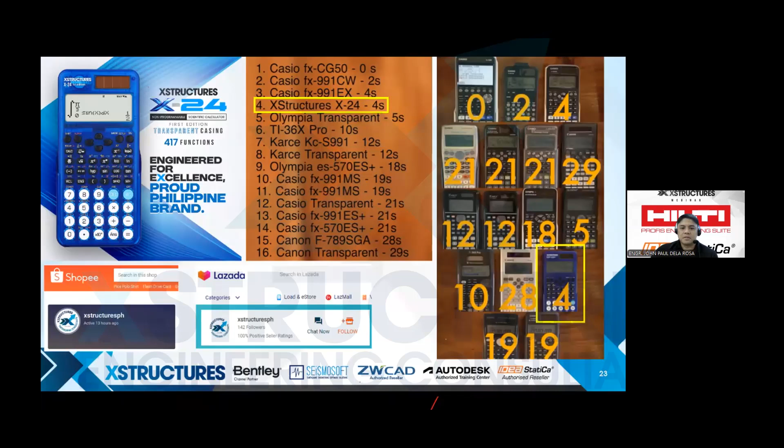So that's one of the reasons we entered the calculator market. It's because as a Filipino company, we can also produce a local brand calculator that can compete with the global brands.

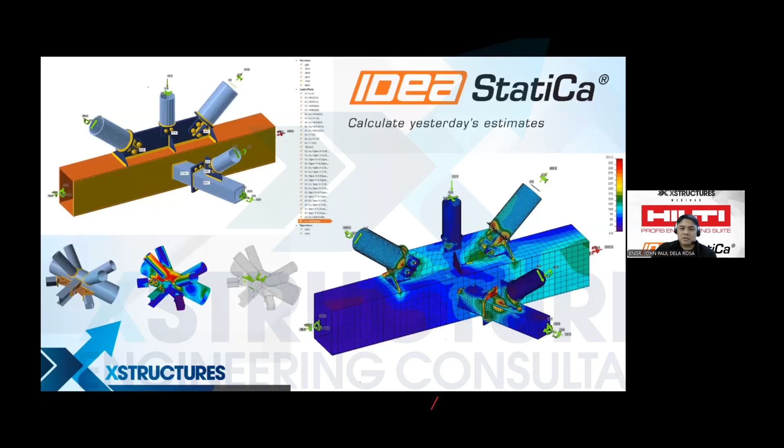We are the exclusive partner reseller for IDEA StatiCa here in the Philippines. IDEA StatiCa is your ultimate solution for complex connection design, like what you're seeing on the screen. These kinds of connections are difficult to design, but there is a tool that can definitely help you with a direct solution. Only IDEA StatiCa can do it. IDEA StatiCa has different levels or tiers of licenses: IDEA StatiCa Steel, Detail, Concrete, IDEA StatiCa Complete, or Enterprise.

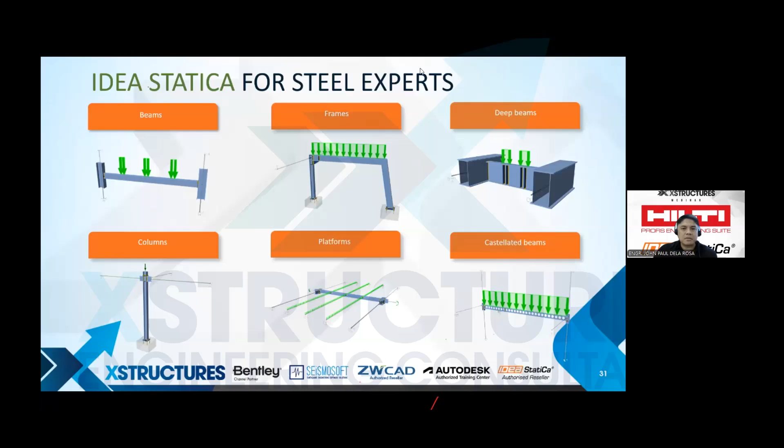For this kind of project, you can also use IDEA StatiCa for anchoring design, element design. This one is integrated with STAAD Pro for base plate design. Also, you can use STAAD Pro together with IDEA StatiCa for this kind of steel elements, for reinforced concrete elements as well, and for precast elements.

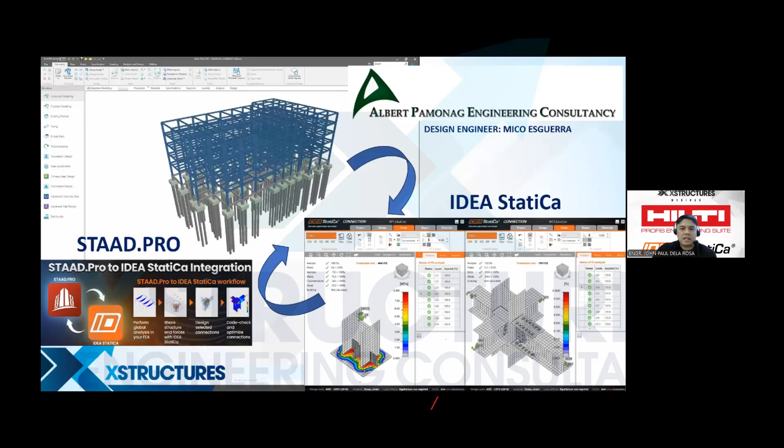For those attending here, maybe from universities or different colleges in the Philippines, we have an X Structures academic program where we can help your school secure academic licenses from Bentley and Autodesk, especially for the civil engineering industry's 6 fields of specialization.

We definitely have software to offer, whether it's structural engineering, geotechnical engineering, construction management, transportation engineering, water resources engineering, or environmental engineering. As I've said, for the different specializations in civil engineering, we have something to offer, not only from Bentley and Autodesk, but also IDEA StatiCa.

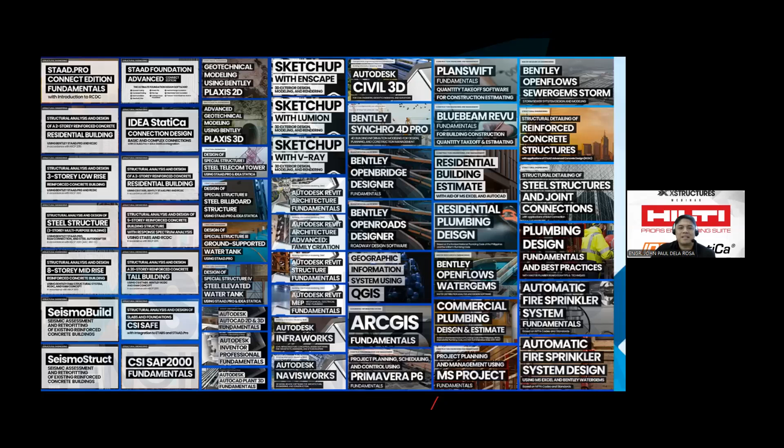And also, of course, Idea Statica and Seismosoft. When it comes to software partnership, we actually have so many partners. That's why we believe, and also from the award we received from Bentley, that's one of the proofs as well.

So for software sales of X Structures, as I've said, we have so many partners: Bentley, Seismosoft, and ZWSoft for ZWCAD. For building design, structural work suite and Idea Statica. For assessment and retrofitting of existing structures.

So we have the solution which is Seismobuild and Seismostruct. And of course, if you need a drafting tool at a reasonable price, ZWCAD is there.

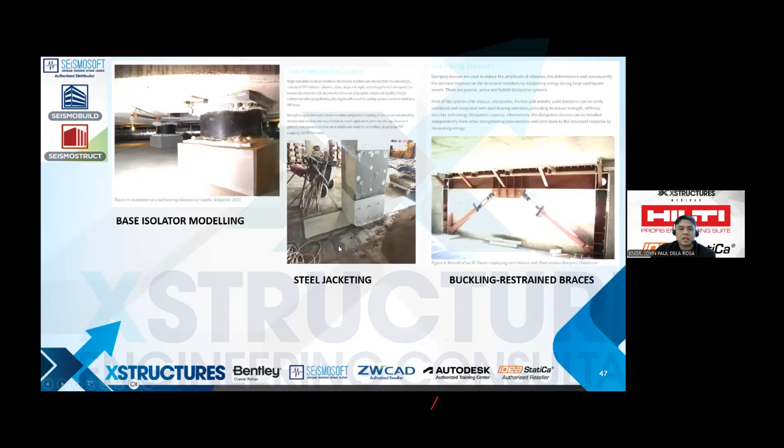For assessment and retrofitting, this is very prominent now, happening in our country. If you have a direct solution for retrofitting design, Seismobuild and Seismostruct would be your solution. This includes FRP and jacketing, base isolator modeling, steel jacketing, buckling-restrained braces - all available in Seismobuild and Seismostruct. That's the FRP sample design in Seismobuild and Seismostruct.

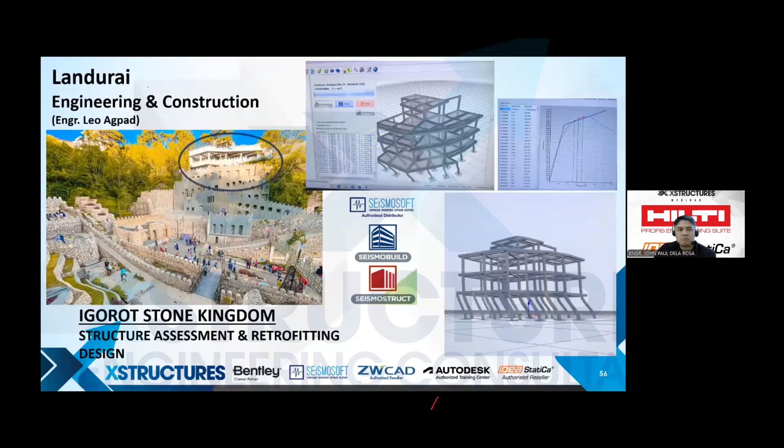It's concrete jacketing. Some of the projects done using Seismobuild include the Vergara Supermarket, and the one which is very popular in Baguio, a tourist attraction, Stone Kingdom - the structure at the very top was retrofitted using the design aid of Seismobuild and Seismostruct.

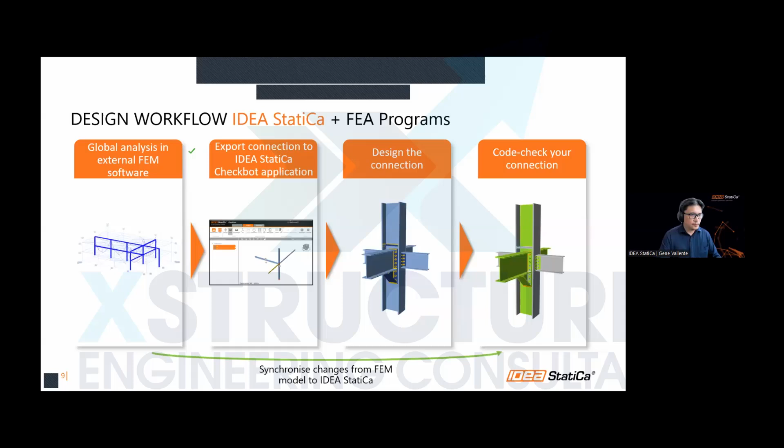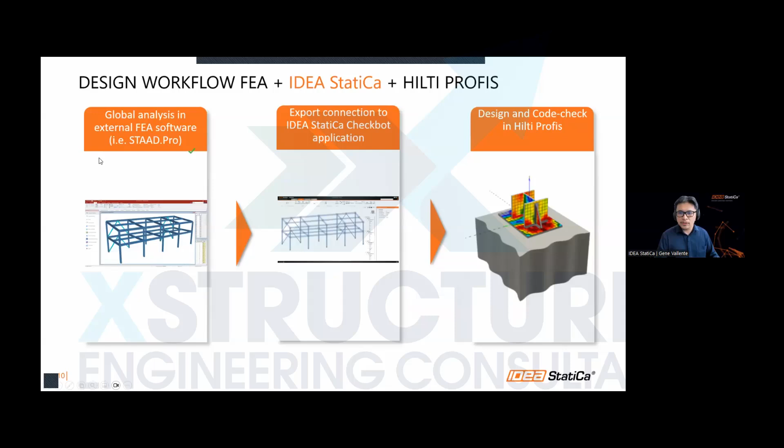Once it is imported, you can do the design from the connection application and also code check in the connection application. The workflow when we transfer it to Hilti is actually the same: from STAAD.Pro, we export the model into the Checkbot application, and once we have that, all the load combinations are captured. The size of the members will be transported into Hilti, and that's basically the simple process of this collaboration between these two programs—just a rough idea.

Hilti or IDEA StatiCa, from Hilti to Checkbot. So we have different programs as mentioned, and transferring of materials, cross sections, and load combinations is already captured in this software. Synchronizations are automatically updated once you captured into your program.

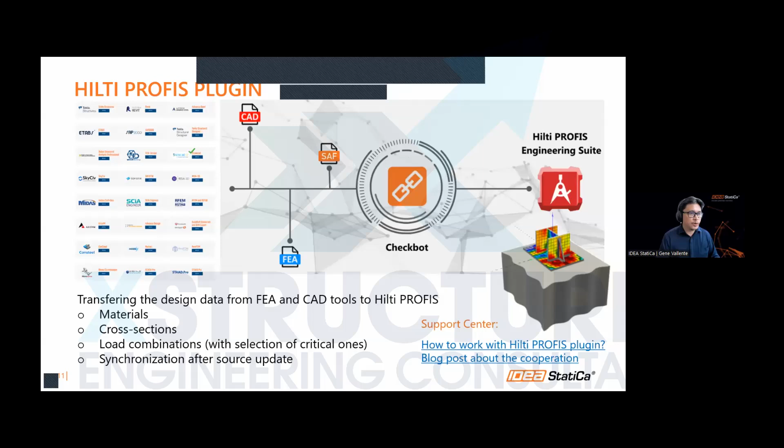Let me dive directly into the demo so we'll have a little bit of time. This is actually my structural model, coming from our good friend in Xstructures. Thanks, John, for this model. It's our example. I will be transporting this into our program Checkbot application. The model is actually a brace frame on one side and moment frame on the other side.

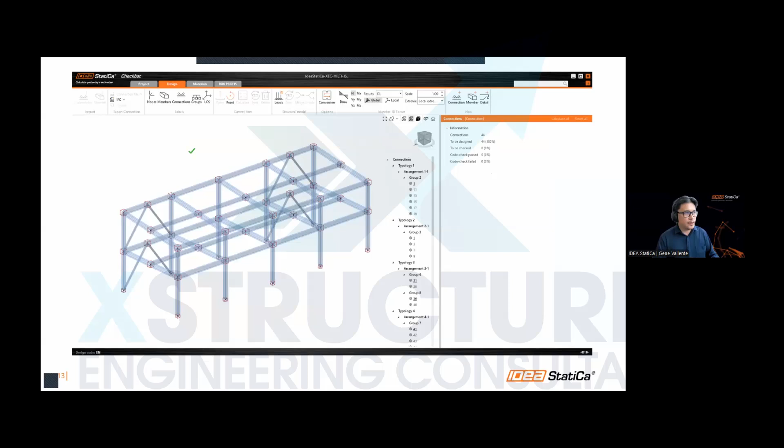This will be captured later in Checkbot, and then we will analyze our connections. Let me just end my slide over there and go to my STAAD.Pro model. First, maybe I should turn off my screen there so you have a little bit more screen size. All right, let me go.

So this model has been analyzed already and we do have all the loadings prepared. So the workflow, all I have to do now is right click, assuming that everything has been analyzed and code checked and verified.

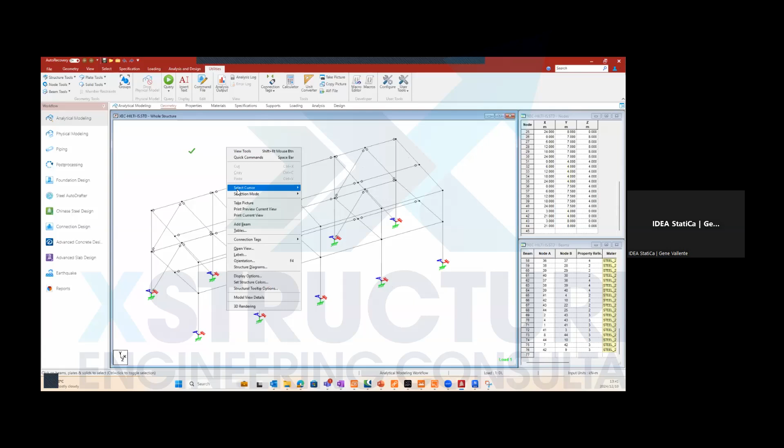To start, in order for us to go to the connection or checkbot application, all I have to do is select the cursor, select geometry cursor, and select every single member or connections. You have the option, if your model is too big, to select only a few members you want to analyze or code check. In this example, since this is a small model, we can just do it all. So what I can do, under user tools, we have to click on IDEA StatiCa Checkbot. I'm going to click on this one.

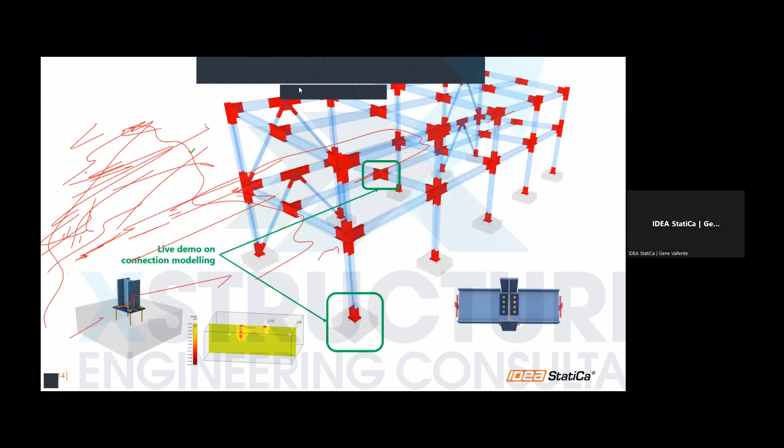Run the file in the background. While this is running, I will just give you a little bit of a hint to manage your expectations, because we are on a time constraint. This model is the one I've just mentioned. I will be doing a live demonstration on these connections. I don't know what is wrong, but I think someone is using the background now. Just give me a second. Let's just continue with that.

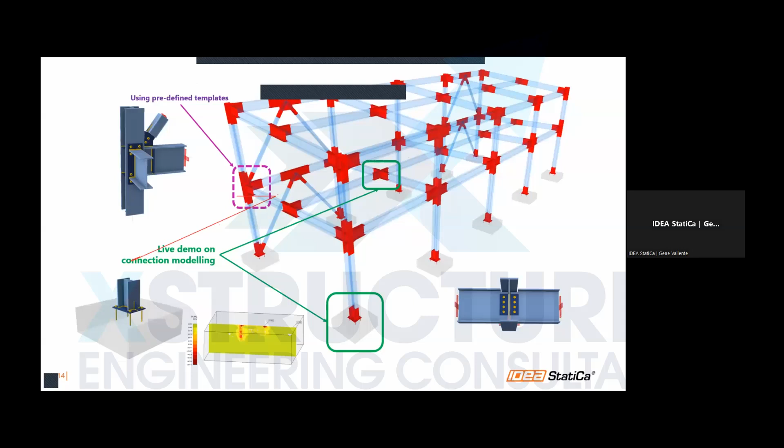So we're going to do a few connections modeling, just simple connections, and we are going to do a complex connection, but using predefined templates, so that at least you will know the workflow with checkbot applications, with grouping of various connections to optimize your design and organize your connections in terms of typology or cross sections. Let me go back to my model.

I think it's now being captured. So here it is now. All I have to do is select my design code. You have the possibility to use different codes depending on the standards you require. In this example, we just stick with the Eurocode. I'm going to create the project. Since I have already selected, all I have to do is just click on connections.

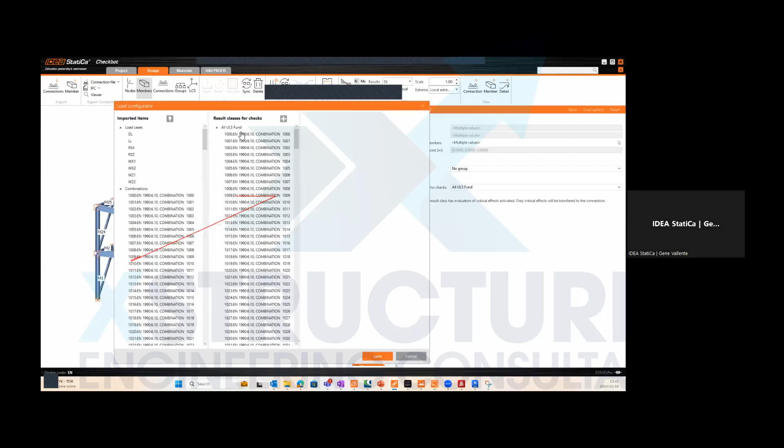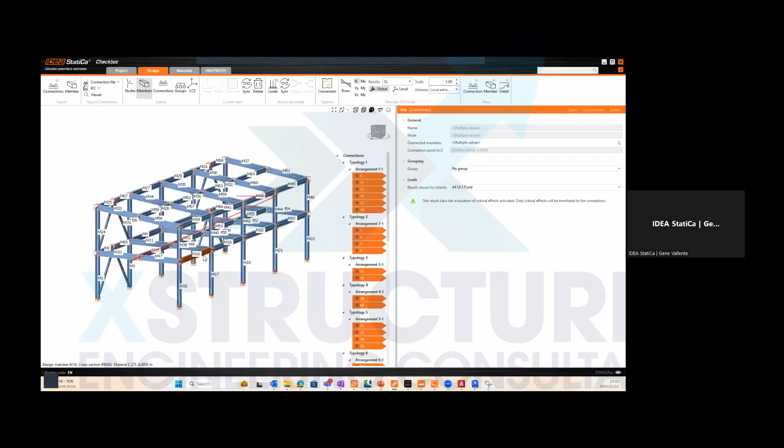So checkbot actually, everything has been captured like we used to. In checkbot, all the information like the loads, for example if I click here, from your global analysis model is all captured in checkbot applications. You have your load case, your load combinations. It can actually cater to a number of load combinations in this application, so you don't have to worry how many load combinations you have. All the members, also the geometry, whether you have offsets, it is being captured.

So in STAAD.Pro, if I go from here, we have an node to node connection with the members. This is captured the same thing in Checkbot. But what I'm going to do is, because some of the connections require us to be a continuous member, here, or the columns for say, you actually have the possibility to merge these members. All I can do here is merge, and I can actually merge everything.

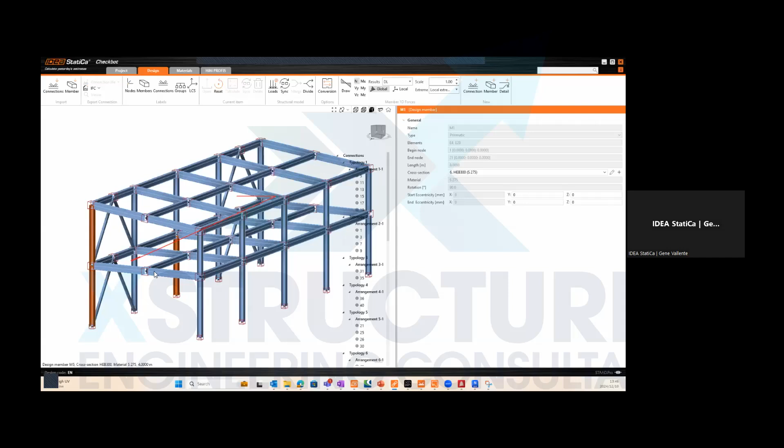And we can also group this according to topology or cross section. So here it's actually grouped automatically according to typology. You can also group it based on typology, which is the orientation of the geometry. Or if you want to have custom groupings, you can create your own groupings depending on which member or which typical type of connections you want to introduce.

Let's say I want to demonstrate different nodes here. This node is actually the same as node 32, 33, 34, or 33, 37, 38, 39. I can create these nodes by manually grouping them, so that all I have to do is design one single connection. At the same time, for example this one, I can also group this. All similar nodes basically can be grouped manually, and you have the options to make it check.

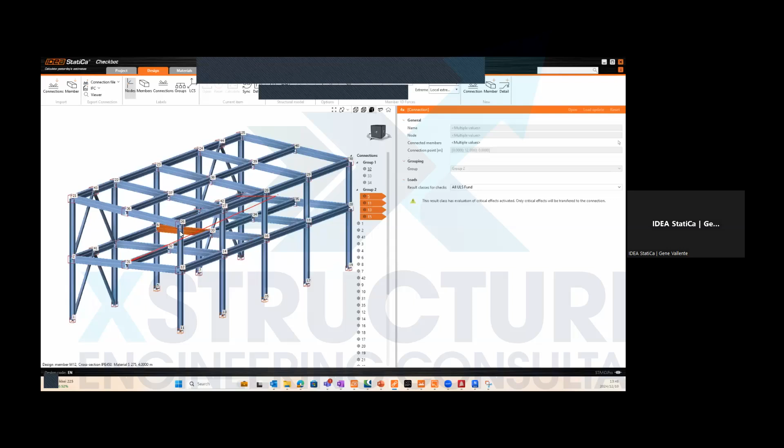So I have here the grouping in order to expedite the process. In order for us to proceed with the design of the connections, I prepared this tool, which I already merged all members that I would like to do. I also grouped all the connections that I would like to do according to my requirements. So here I have a number of groups.

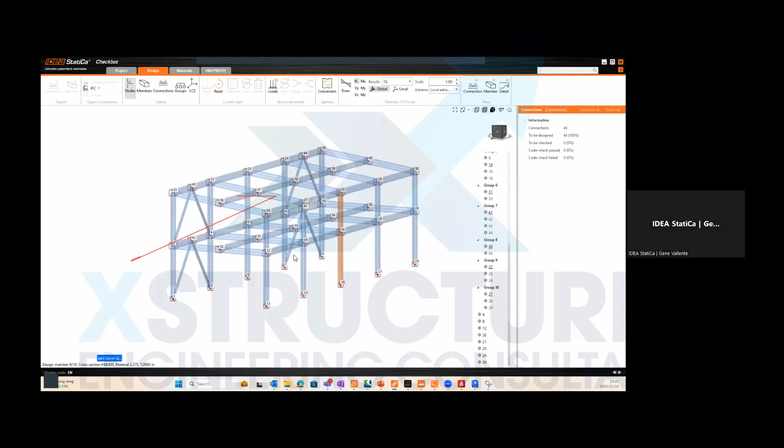This I already assigned differently based on, for example, foundations or joint connections or members. So let's just say I want to analyze any one of this group that I've created. This is under group 2.

In Checkbot, when you group a node, you have what you call reference connection and child connections. When you say reference connections, it's actually the connections that you want to do your connections basically, and your child connections will follow whatever reference connections you have done. So when the checking is done, it checks everything based on those connections, but with different types of loadings, because every connection has different loads.

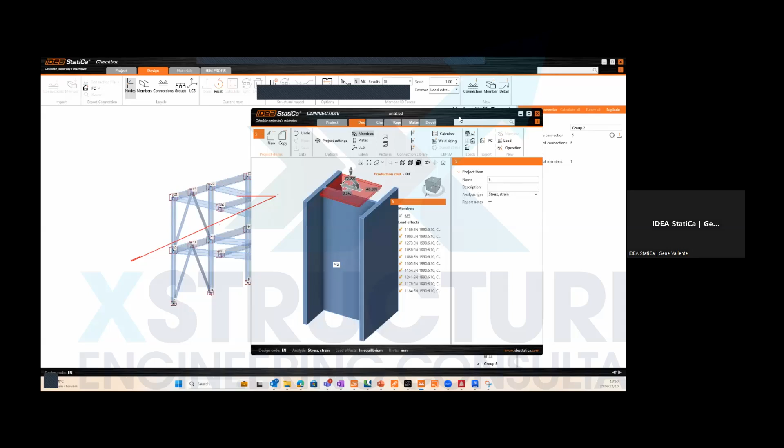All right, so in this example, let me just open the reference connection. Give it a second while it's opening in the background. Here it is. All right, so our member has been captured correctly.

And all those load effects or the load combinations that we have prepared in the global analytical model in STAAD.Pro. So what I can basically do is just prepare manufacturing operations for the base plate here.

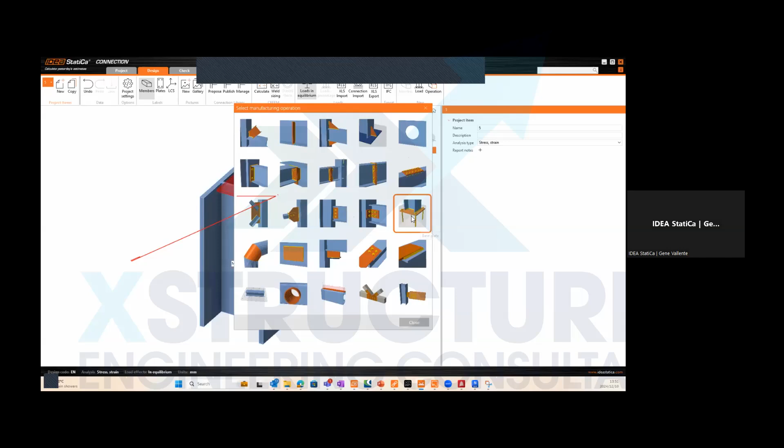So let me just go through operations in this case. There are a number of manufacturing operations that you can use. In this case, we will just proceed with base plate operations. I click on base plate, and it will automatically capture or assign operations for the base plate for you. The program is smart enough to do that. So all I have to do is basically just adjust these parameters.

So let me just say, okay, I want to change my material to S275. I want to change the thickness to 16. And if I do it this way, I want to maybe change this to 50 so that I will have a slightly smaller base plate. And the anchor, I'm going to change it to M20 in this case. I'm going to leave the anchor length at 160 mm.

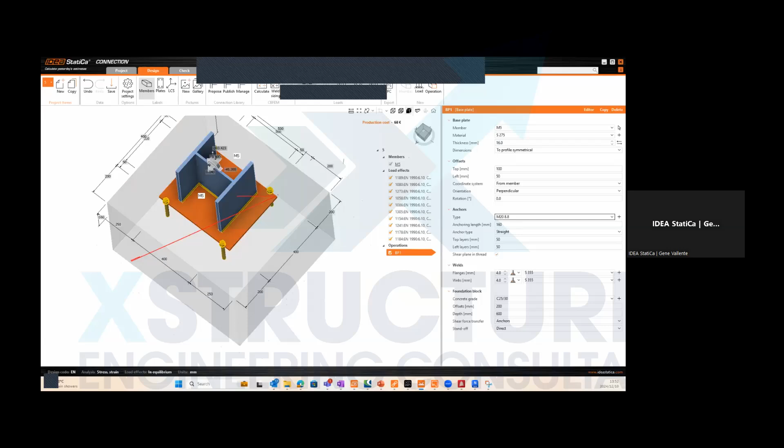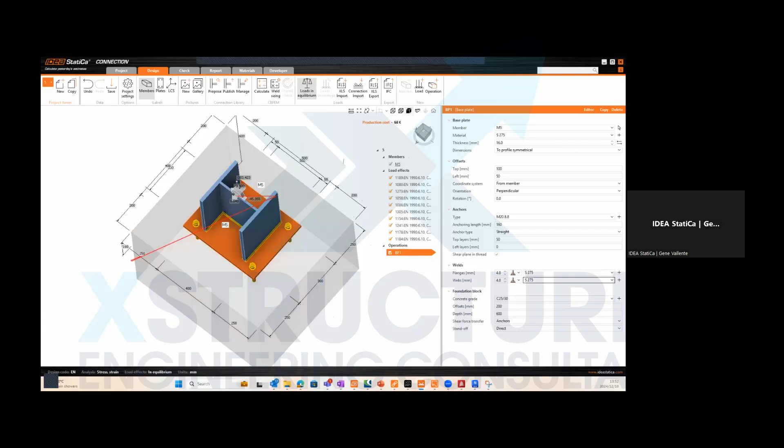And we still have an out of plane here, so let me just change this to 0 in this case. I'm going to change the weld grade to S275 in this case, and for the concrete grade, I'm going to change this to C30/37. And the foundation, let me just change this as well to 500. Okay. So from here, we actually want to put some ribs in this case. Now we have a moment base plate over here.

So let me just add a little bit of rib, for example. Here I'm going to add some using manufacturing operation rib. And then, of course, I want it to relate to the outside member now.

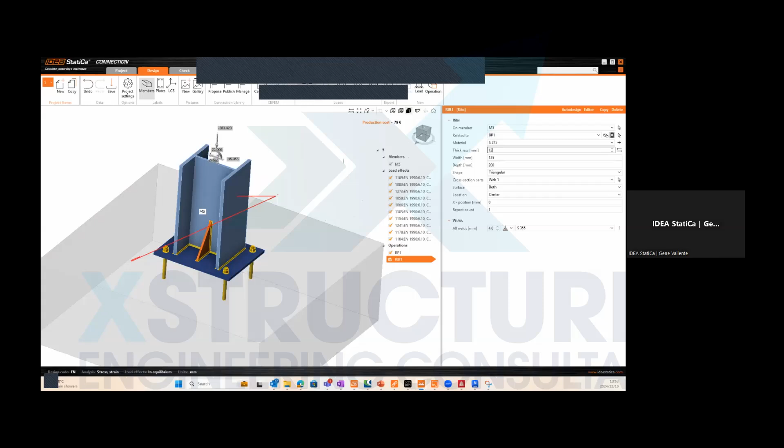So let me just change this thickness. I'm going to change it to 12 mm. And instead of web, I put it into the top flange. But I want to make it chamfered now.

So it's a little bit off. Let me change the width into, in that case, 100. And then this one is 150. And this should be only on upper.

Right, so it's rather quick, as you can see. It's much easier to use this program, by the way. I can add some chamfer. In this case, you have all the corners indicated over there. All you have to do is apply it to a corner.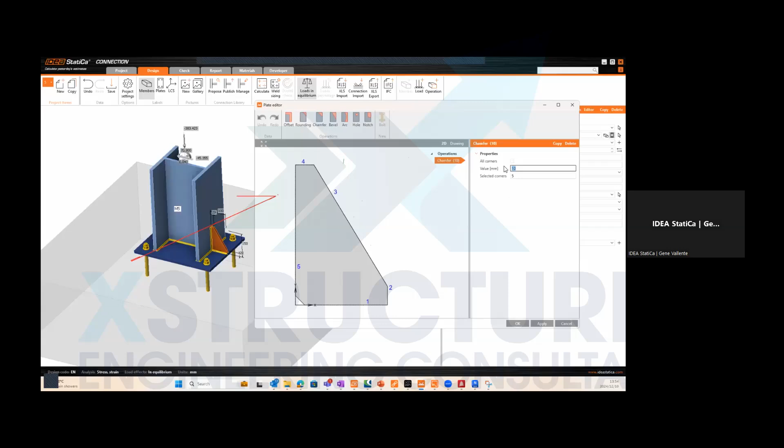So in this case, I want to put in corner 5 with a value of 20 mm. The whole thing, I have some chamfers over there. All right.

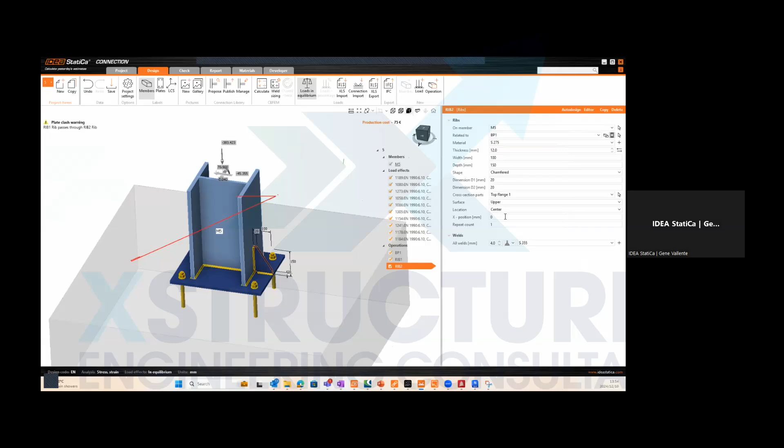Now I want to copy this into the other side. So all I have to do is copy. Now that I have copied it, all I have to do is change it to bottom flange here. But in that case, once you change the upper flange, of course, you need to change this surface to lower as well.

And that should complete our simple modeling of the base plate. So by right, you should be able to analyze this in the calculation itself, but I'm going to skip this for now because I want to show you that I can calculate or bulk design this in the Checkbot application. So I just save this in this case and close it.

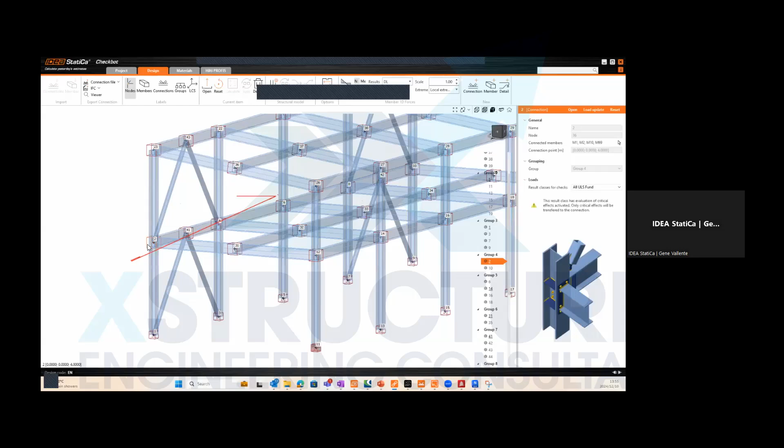So now that I have this base, according to this group, maybe let's try to open this in this case now. So we have there group 4, group 2, and connection 2 and connection 10. So all I have to do is open the reference connection in this case again.

So let's just wait a little bit for a few seconds while it's open in the background. Okay, here it is.

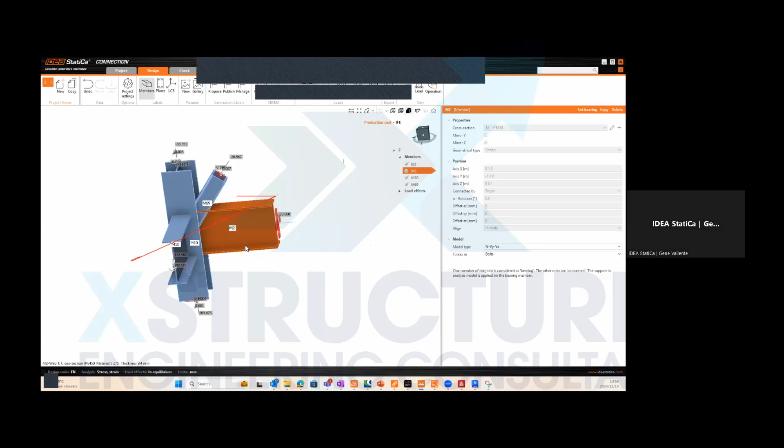In this case, we have all our load effects captured, and all the members assigned now. We have our bearing members, and all our connection members. So I think we will just have to check that the model type is correct.

In this case, my model type for member M2 is assigned correctly. For member M10, which is going to be a moment connection, the model type is already captured correctly. My bracing is also captured correctly.

Okay, so we already prepared, like mentioned earlier, that we are going to use predefined templates to model this connection. So from the connection application, all I have to do is click on propose.

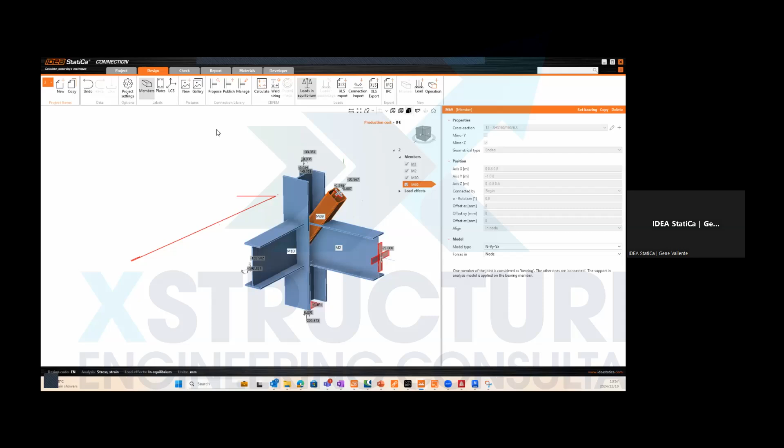Of course, the connection library will be opened, and we have here a capture based on the topology or the type of members that we have predefined. So all I have to do now is click on OK.

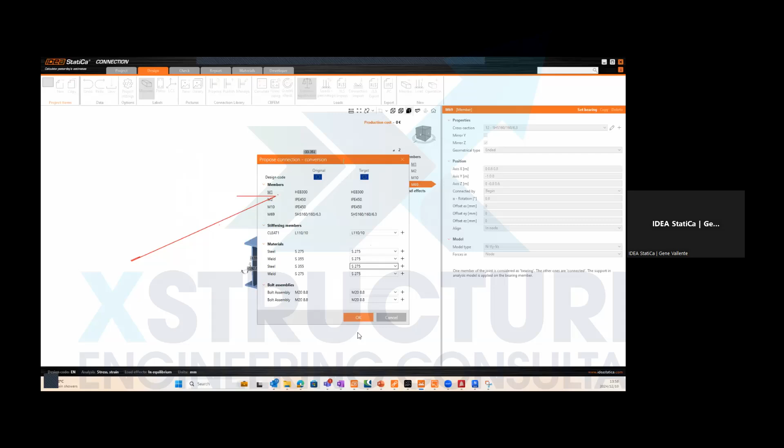Of course, you need to check whether the materials that you want to use are correct, and you need to apply the correct steel grade. I'm going to leave the bolts as M20, and click on OK.

So we have our member ready now, just with a few clicks, because we have already predefined our connections. Just to show you the workflow, I'm going to save this again and click on close in this case.

So we have two of the connections that we have, but we could have different connections if you guys have created multiple connections like the example shown here. You can also do that in that case. But in this presentation, we only provide two groups, which we already predefined with manufacturing operations.

So since we have it, let's do and calculate. When you click on calculate the groups, all of the connections, the reference connections and the child connections, will be code checked based on the parameters that you have set on the reference connection.

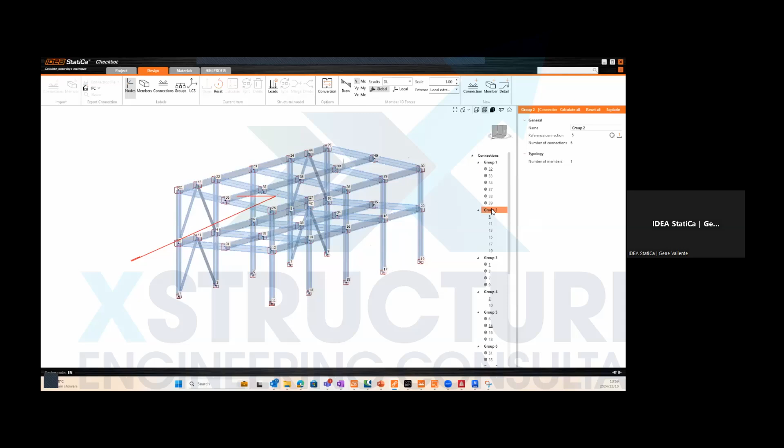So you only have to model one, actually. You don't have to check every single similar connection in this case. So I'm going to click on calculate.

And I'm also going to do the same to calculate on where we have member number 2 in this case. So I'm going to click this one. Okay, give it a few seconds while it's running.

All right, so you see it's already running in the background. And I'm also going to calculate this group.

So you can already see that the workflow has been optimized or simplified, because you only have to work on one single connection to check a different number of connections yourself. So it actually saves you a little bit of time.

All right, so it takes a few seconds to a couple of minutes to run the whole checks, but I have pre-prepared this for you to expedite and save us a little bit of time.

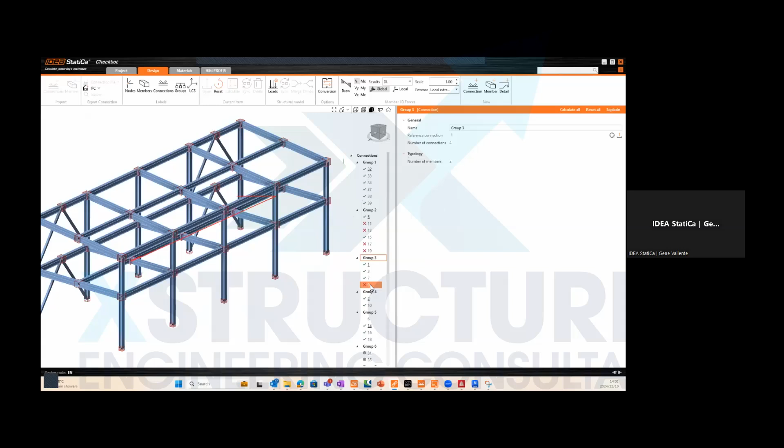I have prepared for you some results of our connections. So in this example, we have connections that are failing. In this group, we have connection 9 that is failing, and we have connection group 2, which is also failing.

You can see that if I turn on the nodes, or even if you turn on the group number, you can see which node is that now.

So let's say, for example, you want to select group 2, because this is actually the member or the base plate that we have taken. So this is actually member number 11. In this group, we have 5, 11, 13, and the failing nodes are actually node 11, 13, 17, and 19.

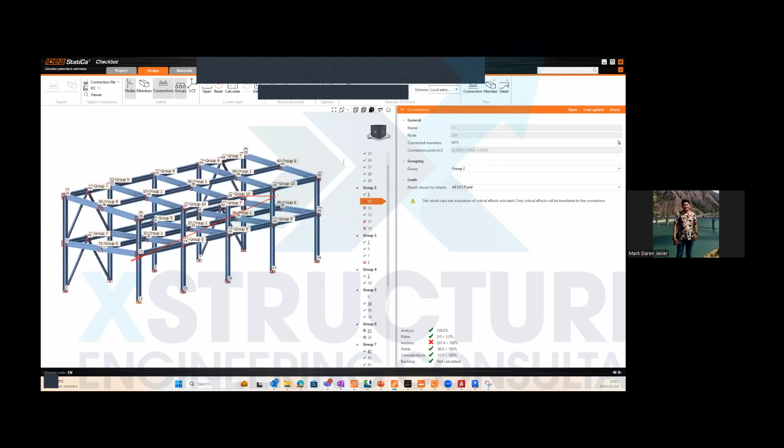Okay, so we have failing members.

Of course, this is the foundation. This is the anchoring that we are discussing. So in the analysis, you can see in the results, it's 100%, meaning every single member has been analyzed and all the loadings have been applied at 100%.

Welds are checked at 90%. Concrete blocks checked at 21.7%. But what we are failing here is actually the anchors.

So let's open node number 11 for this anchor. Let me just right click or double click on this one, number 11. And we can see, let's open this in the background.

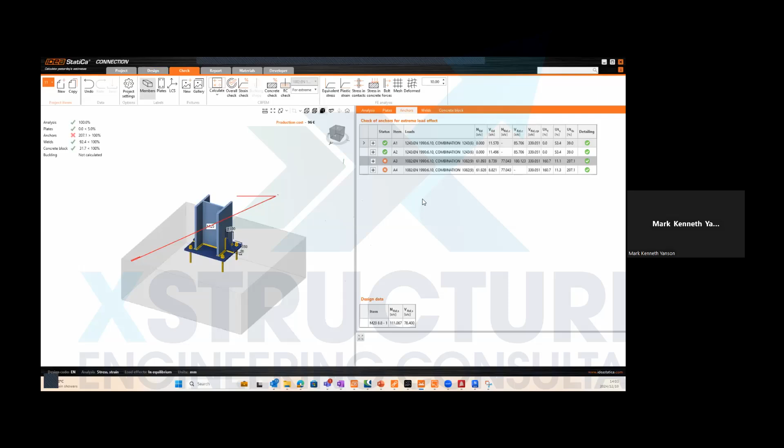Okay, so this is actually member number 11. You can see that anchors is failing. And if I go on checks and I go directly to the anchors, I can already check which anchors is failing and what checks has been, in what checks has the anchor failed now.

So if I look into this, if I print preview on the report, I can see that. Okay, let me just go through. I can see that the anchor is actually failing in concrete breakout.

The reason for this is actually because in connection application, the concrete block is analyzed without reinforcement. And in order to make it pass, usually some of our colleagues will just say, okay, let's just make this concrete block bigger or deeper, or make the anchor a little bit longer or something. But you're not actually optimizing.

So if you consider your reinforcement from your foundation to check your anchoring, you can actually do that in IDEA StatiCa. And thanks to this 3D detail application, you can use this tool to check your anchoring. Now, if you go into this check tab...

We have here RC check. So I can actually click this and run the checks based on this, what you call that, member.

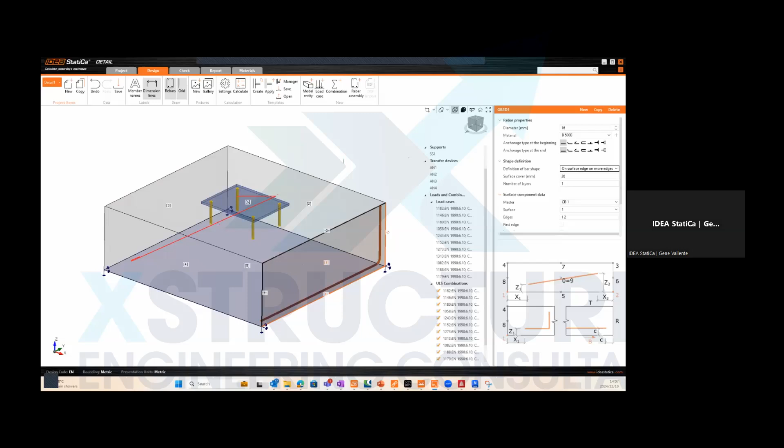In this case, I'm going to change this to 50, and I'm going to apply it on edges 1, 2, 3, and 4. I can change the end to different bends, or I can just make it same as this way.

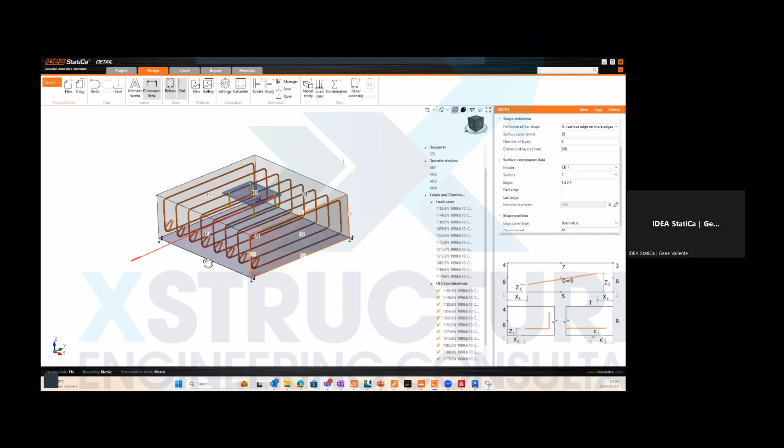So I can also change the user value here to, for example, 50, or just make it like this. Then here, the number of layers can change to 8, and this is to 200. So I have basically my reinforcement applied to here.

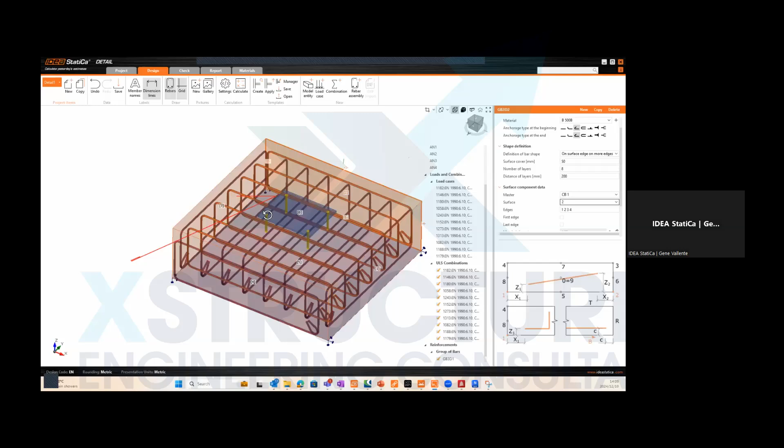So it's actually quite easy to replicate this reinforcement. I think you're already familiar what I'm going to do here. All I have to do is actually copy this thing. So once I have that copied, I'll just have to change the surface myself. So all this information is also applied.

But then, of course, we need to make some a little bit of adjustment here. Let's make it 7 instead. And then this one 65 to make it a little bit symmetrical. Probably this one a little bit. All right, 250. So we don't have, and maybe, so this is your foundation reinforcement.

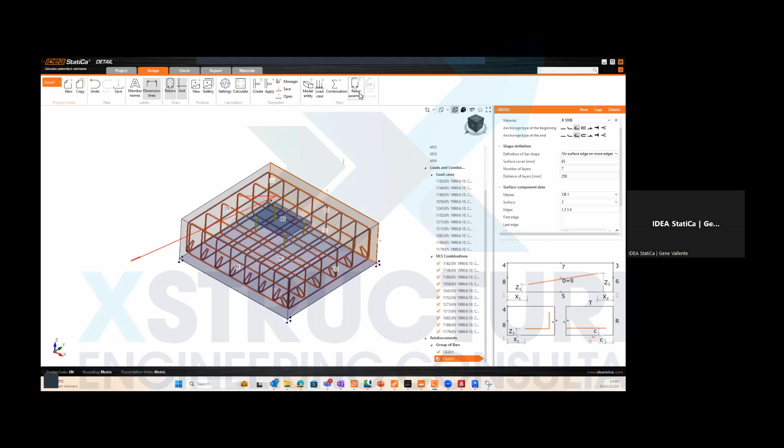And in my case, I might want to put some supplementary reinforcement in this case. So let me just put some supplementary reinforcement for bars, but in this case, I'm going to change to 10 mm. And I want to put it near the anchor itself.

So in this case, the same edge surface, but this time I only want 3. It's 1, 2, 3, 5. And then at the edge, 2, 3, and 4 only. So I'm gonna change this to, okay, I can see that already it's been changed.

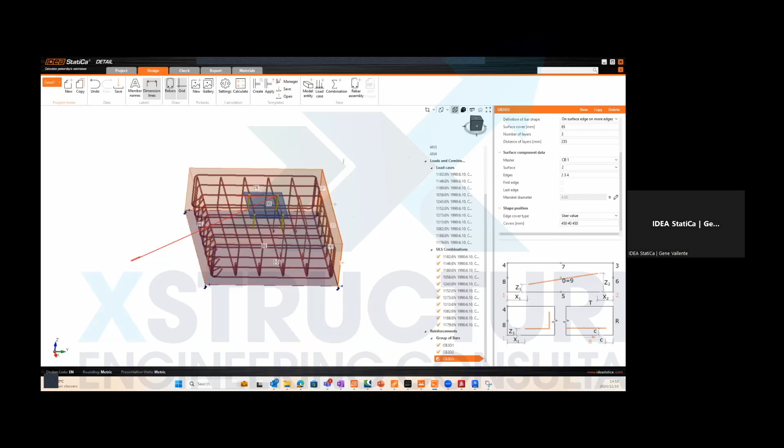I'm gonna change the settings to the cover to user value and put it, say, 40 and 450. And then, okay, I have that correctly. I'm gonna change this to 510. So I applied my, what you call that, supplementary reinforcement near my model.

So I'm going to copy it again. And at the same time, I'm going to change this to 1 in this case. But I think it's a little bit long. Okay, I can make some adjustment. So let's just say -350. And then this one is 350 to have a simple. Let's do that on the other side.

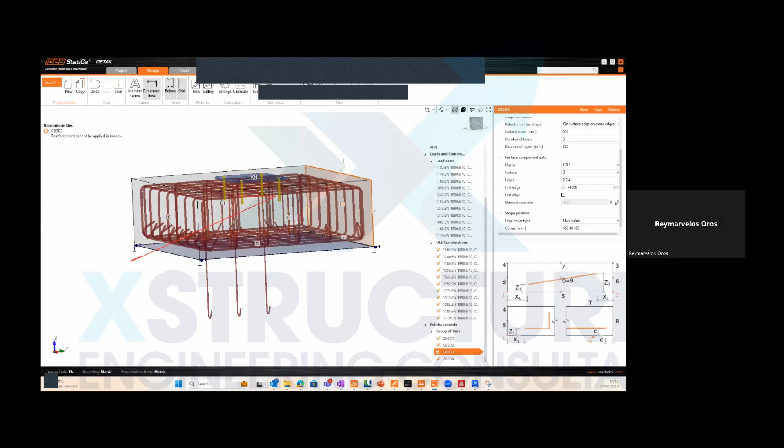So I have supplementary reinforcement near my anchors. Well, I'm going to change my anchors, because this is not going to be an adhesive one. I'm going to change it to a cast-in-place anchor.

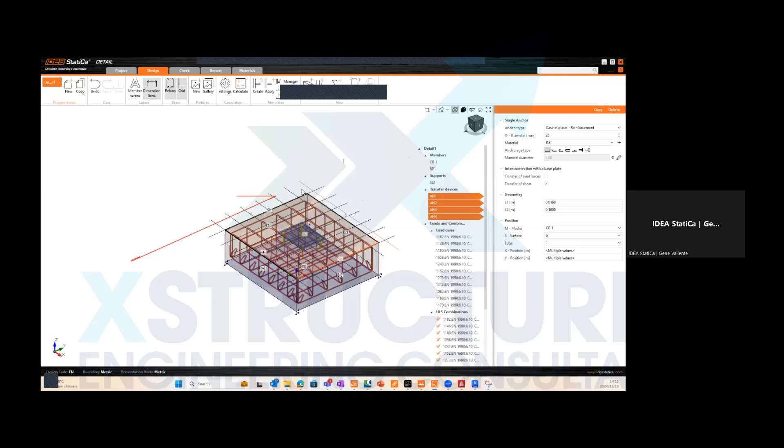So we have completed our modeling of the reinforcement. That's basically it, giving you a few minutes of modeling. So now we are ready to calculate, to check whether this is correct, whether it's passed or verified.

If I hit calculate, it could run a few seconds. Thankfully, I have prepared results for that, which is already available here. So you can see from this, the anchor utilization is about 207%. You will see that we now have 99.8%, all the load combinations have been captured, verified, passed.

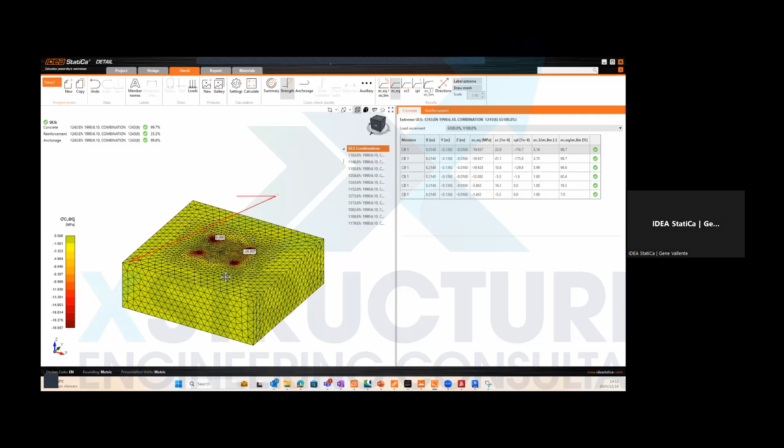So you can actually check the stresses. If I go from here, this is the limit of the stress. Green represents up to 90%. Orange represents 90 to 100%. And with anchoring, most of us engineers actually want to look at what is happening inside the concrete, not just on the surface.

So if I go back to strength and I want to cut a section from there, all I have to do is click on new and apply some cut sections. In this example, let's just say X, probably 2.5. And if I click on this, let me make it a little bit bigger.

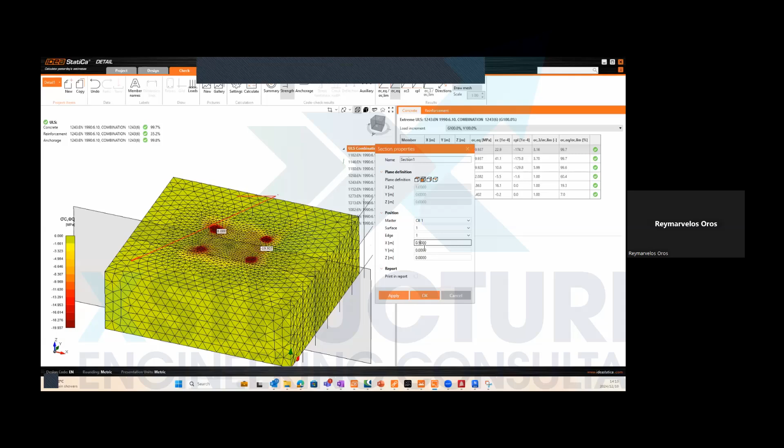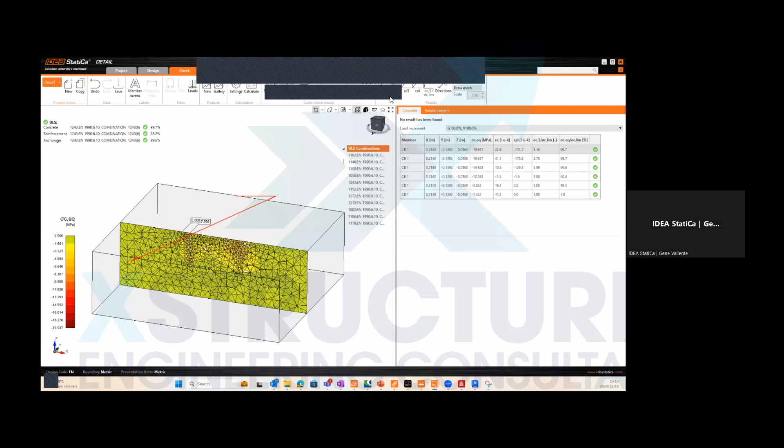So you can see all your stresses, and it actually looks like the shape of a cone. So you can check also your anchorage in this case. So your anchorage is actually our critical part, and that is why one of the reasons we are putting in supplementary reinforcement near our anchor.

So you can see, based on just simple reinforcement, it actually makes our anchorage a little bit better in this case. So that's basically the end of my presentation, and I hope it's a little bit useful to you guys.

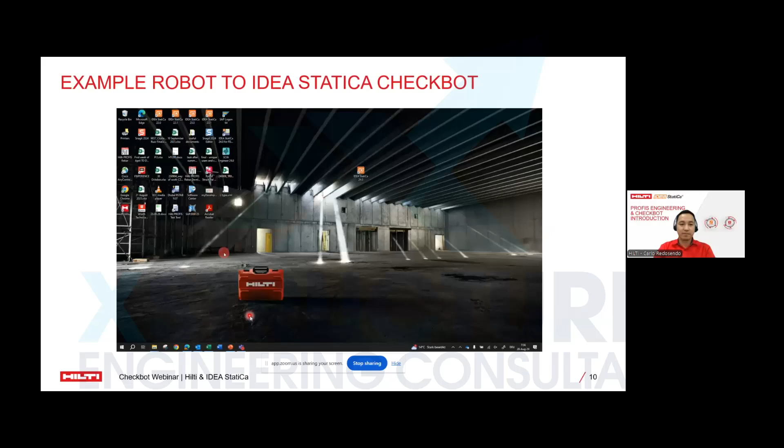Okay, so with this, let me show this video demonstrating the transfer from Robot to IDEA StatiCa. Let's skip this one. Forward. There, the model is loaded.

So here, this is a steel member, and then post-installed anchors would be used as fasteners for the pedestal, and then it reflects the reaction loads that will act on these connections or nodes.

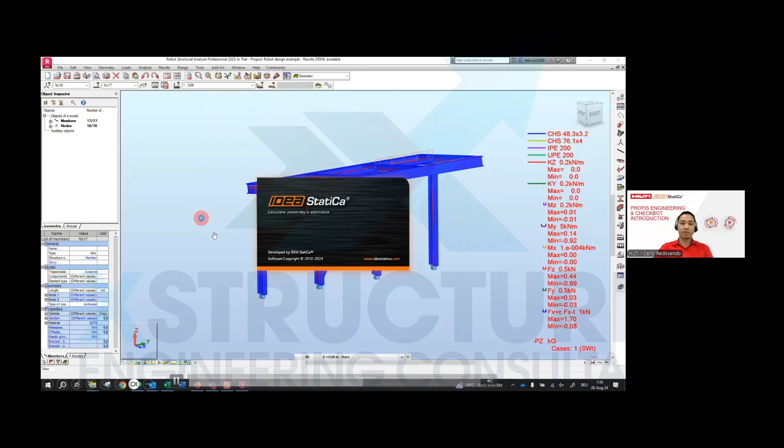Then, to connect to Idea Statica, just click add-ins - same with different structural software. So add-ins or tools, and you'll see Idea Statica. First select the members you want to transfer, click Idea Statica, and it gets loaded into the Idea Statica software.

Okay, and we can now start transferring the data from Idea Statica to Hilti Profis Engineering. I'll stop the video and do the live demonstration. I hope you can still see my screen. Yes, visible. Okay, thank you.

So here, this is the same model as in Robot. Just open it. This is the waiting shed. So we have different nodes reflected here, but there is a limitation.

Just to clarify - if you see here, we have nodes for steel to steel and steel to concrete connection. There are two nodes here that have bracing. This is one of the limitations of Profis Engineering - for those familiar with it, we don't yet have 2 profiles per connection that can be designed. So only one profile at a time.

So for now, let's select one node first. Okay, select N1. Okay, it reflects here. And then we could click loads - these are all the load combinations that are in N1.

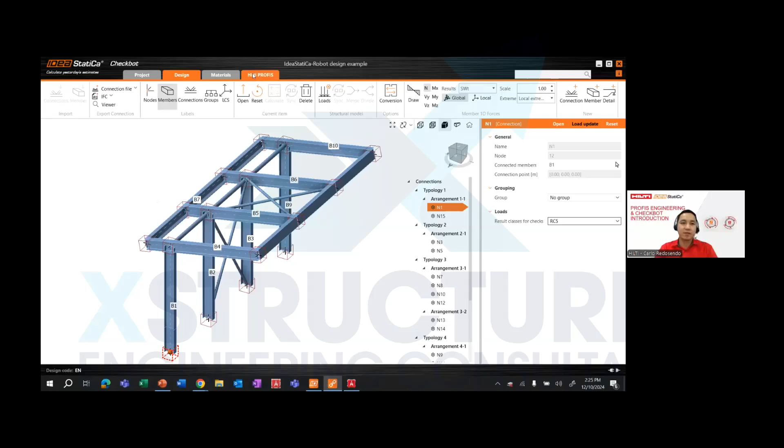Click save. Then double check RC5, and then you are now ready to import our loads - export our loads to Profis Engineering. So just click Hilti Profis and then click export.

I have already opened the Profis Engineering software. It will load here. This dialog box would be reflecting to you upon clicking the export button.

This clearly defines what data we've transferred. So checked are the loads, the profile type, the steel profile, and the design standard. If ACI, this will reflect in Profis. If Eurocode, that will also reflect. Other data are not transferred.

We will be modeling or designing it inside Profis Engineering - the base material, dimension, anchor layout, the loads, the units. Click continue.

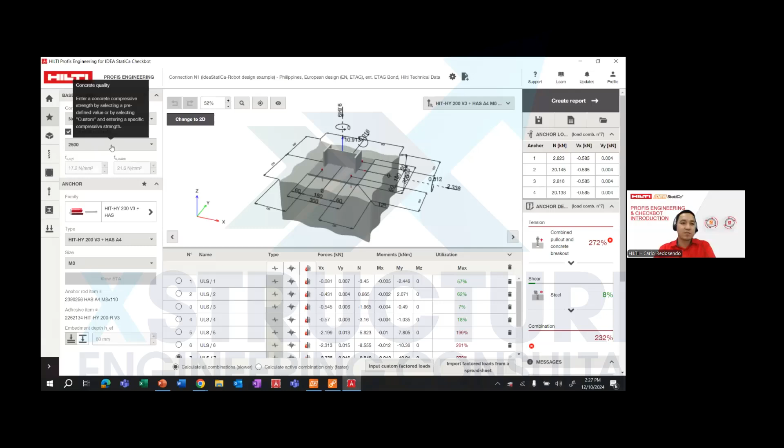If our connection doesn't pass, it turns red. In post-installed anchor design, we analyze the different capacities in different failure modes - it shows here if it fails in steel, breakout, pull-out, splitting, and even in the load combination formula.

So let's first update the concrete base material. This is very important in anchoring design because it greatly affects the performance of our anchor. So 5,000, and then rebar.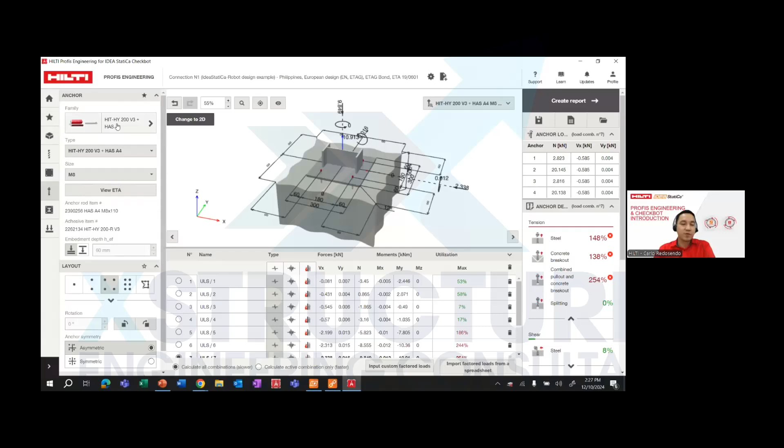Let's proceed here to the base plate, okay, now to the anchor. So for the anchor, pre-selected is HY200 which is our chemical anchor, but you could select from many choices available in this region.

It's pre-selected because of the Eurocode, so the anchors that reflect here have approval for the Eurocode. But if we select ACI instead, everything that reflects here has approval for ACI.

So just select the anchor again, and then it will show here - you could filter. For example, let's select mechanical anchor, select HST4R - R means stainless. And then it fails, so let's try to edit.

M12. So from M8, we made it M10, it failed, we made it M12.

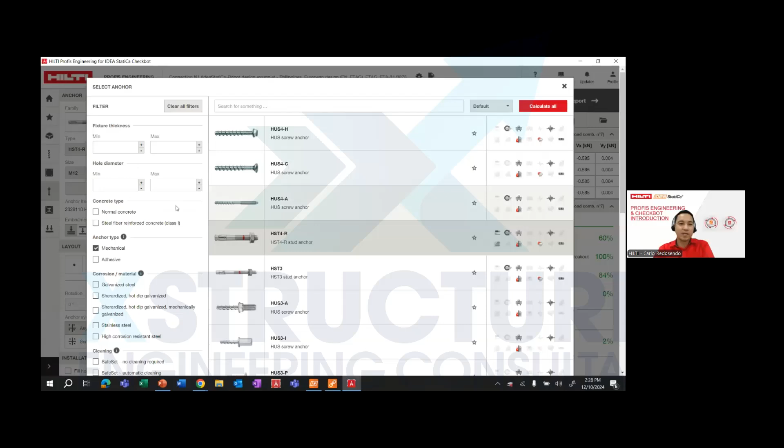Or what we could do is just drop down this and then calculate all. We could filter it, whether mechanical or adhesive, but just click calculate all. It will reflect here what are the recommended anchors that could work for our connection.

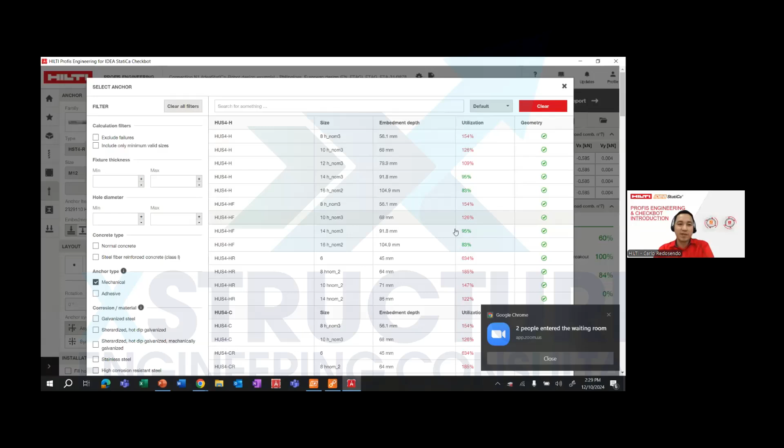So it's listed here, these are the types of anchors, this is its utilization - red means it fails. Below 100 is passing, 100 and below is passing. You can see the depth, the diameter, and the type of anchor. So it says here HST4R, M12, 74mm embedment, 100% utilization.

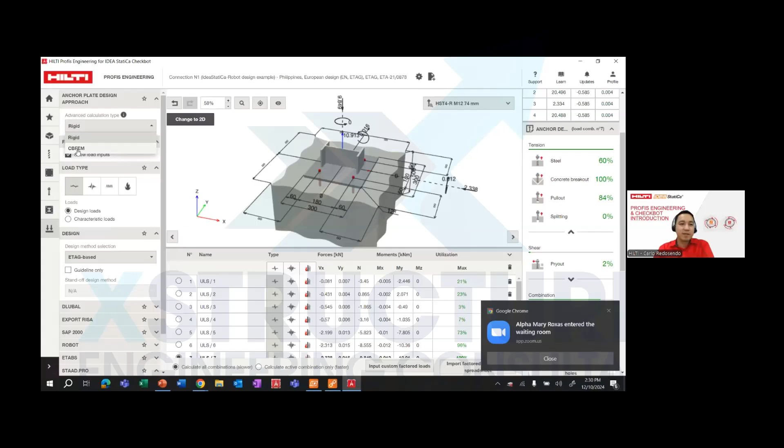And lastly, for the premium version - like I've said earlier, we have two versions, standard and premium. So here, just click loads and calculation type. We could drop down and select CBFEM. This is actually a partnership with Idea Statica - this CBFEM method is developed by Idea Statica.

If we select this one, we'll analyze our steel profiles, like the base plate, the profile, this wide flange, the welds, and even the stiffeners. I won't be conducting the base plate design deeply, but we could try it now.

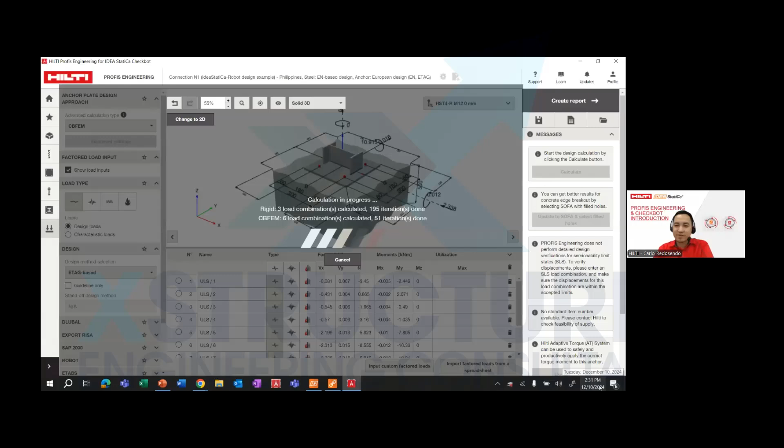So let's try to calculate here. On the rightmost tab, just click calculate. We'll be extending a little bit, so just give me around 2 to 3 minutes.

So here we could see the stresses or deformation acting on our base plate, and even the concrete stresses. In the code, we could analyze our base plate in linear or non-linear - for CBFEM, it's non-linear analysis.

So I know you're very familiar with it. Based on research, the deviation from linear analysis to non-linear analysis should be 10% or less - the anchor reactions deviation. For example here, there was 20.5 kilonewton from linear analysis, which became 25.9 - so 26%, above our recommendation.

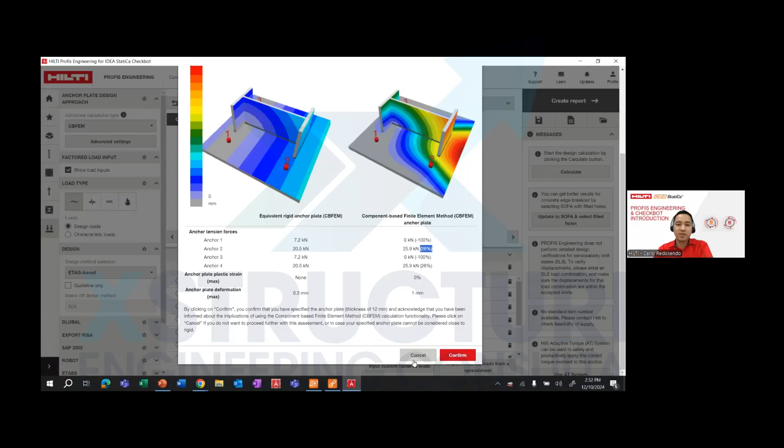But you have engineering judgment - you could confirm if this is okay for you at 26%, or you could follow the research that says the deviation should only be 10%. So from here, let's try to bring down the deviation. Let's try to cancel and then increase our base plate - 20, and then calculate.

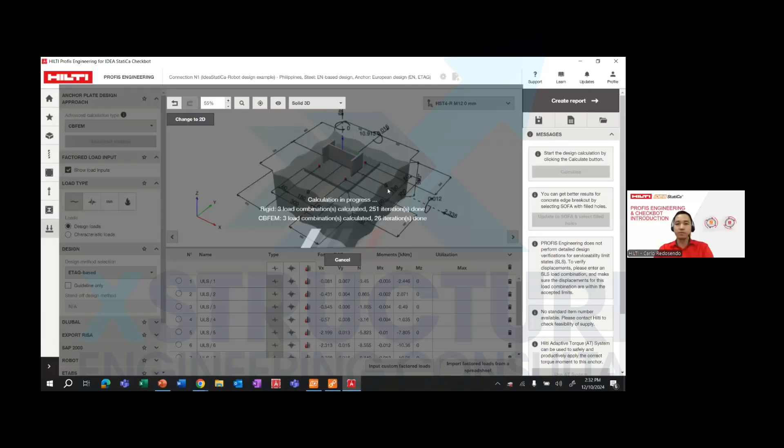Click confirm, and let's double check if our anchor still passes. Because when you analyze nonlinear, there will be additional prying forces added to the anchor, so our earlier design might fail once analyzed as nonlinear. So upon double checking, it's okay.

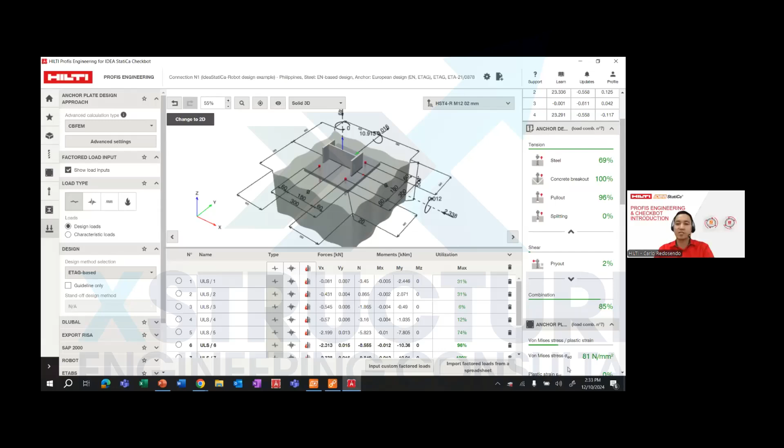So it passes. From there, we can create a report. Just click export.

Here, we can also copy the specifications of what we modeled. So all the information is here - Hilti HST4-R, the important details like the embedment, the diameter, the material finish, and even the approval you need to put in our specifications for this specific connection.

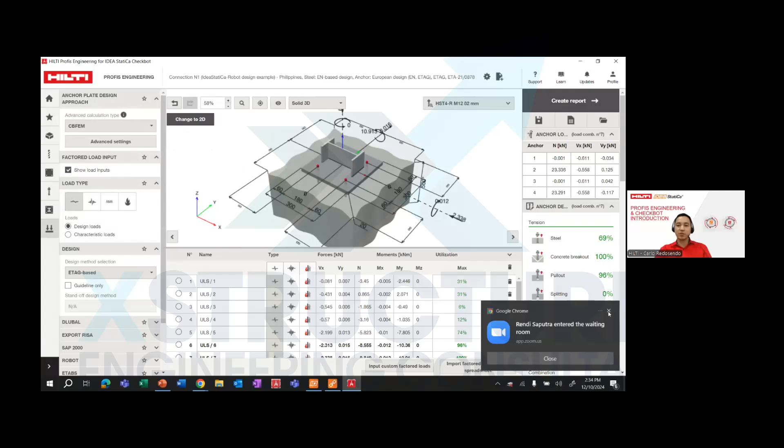So for now, that would be all for the demonstration. I would like to go back to the presentation. I have a few remaining slides.